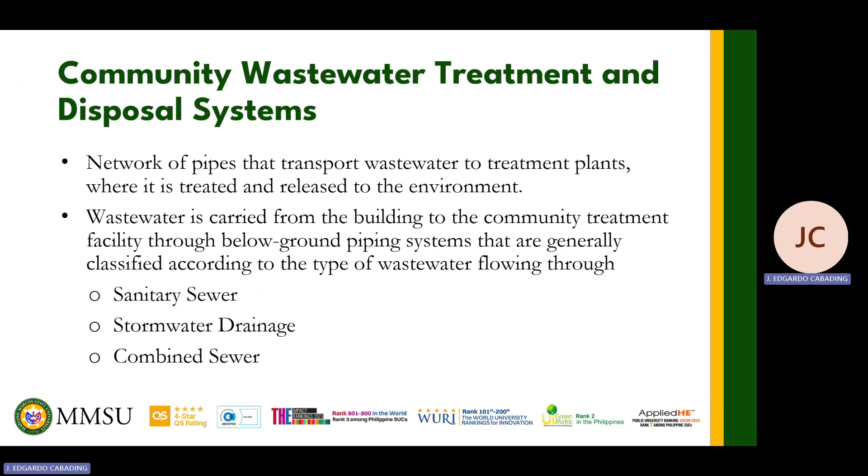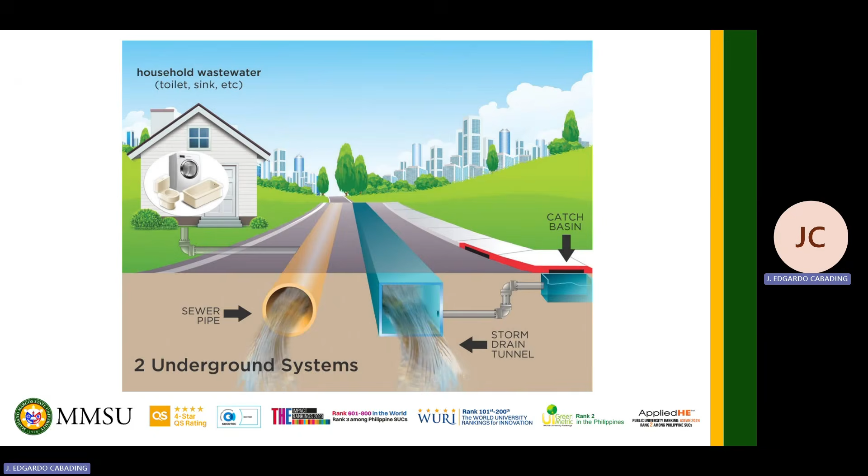If we do not have a public sewer, this is what we use: the on-site sewage treatment or alternative systems, also called septic or private sewage disposal systems. This is typically what we Filipinos use, because there is no developed public sewer in the country.

The building sewer is also included here. We discussed the building sewer in the previous chapter—that is the part of the DWV piping system that connects to the sewage disposal system.

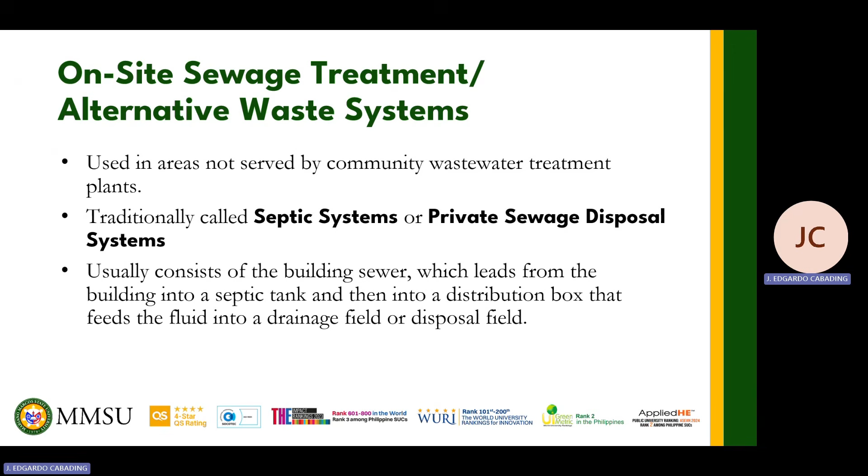These are the components of OSST. We have the primary treatment component, for example the septic tank. I say example because we also have other types of primary treatment components that work like septic tanks, but this is the most used because of its simplicity and practicality.

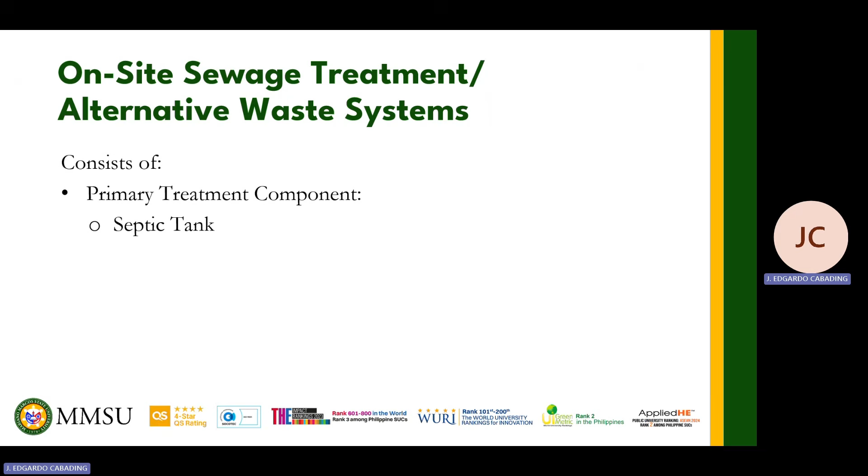The process is easy, the construction is easy, and it's cheap. Since this is what we've used in practice even before, we now have developed sets of codes that provide clear design guidelines for septic tanks, so it's regulated. Whereas for other examples of primary treatment components, we're not familiar with them, so for practicality we tend to shy away from using those other components.

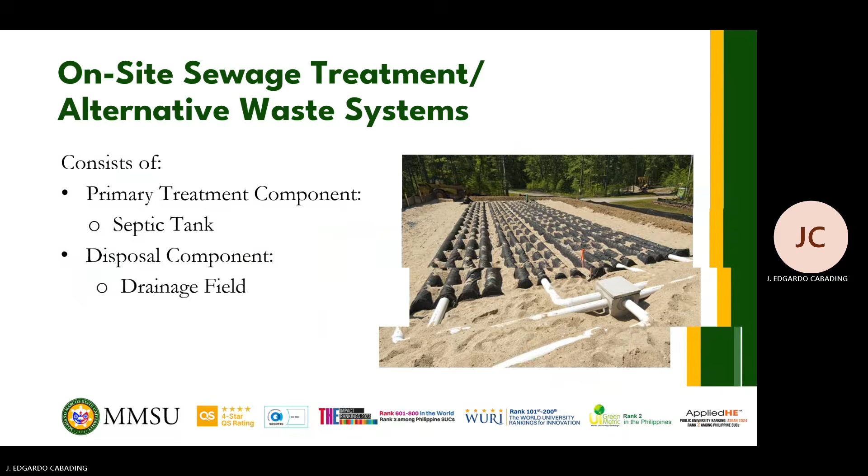Let me walk you through the process of an OSST, specifically the septic tank system that we use. Wastewater or sewage transported via the DWV system will end up in the septic tank, our primary treatment component. The wastewater then goes through several processes, including sedimentation, flotation, and anaerobic digestion.

In sedimentation, the solids will settle at the bottom of the septic tank and eventually become sludge. Then in flotation, the lighter liquids, such as grease and oil, will float to the surface and become scum.

In anaerobic digestion, the anaerobic bacteria consume the organic solids that settled at the bottom from sedimentation. These bacteria live in the septic tank in the absence of oxygen, since we seal it off so no air can get inside the septic tank.

So after some time, guys, these solids will become sludge. Like I said earlier, kapag sinilip niyo yung septic tank niyo, ito yung black na makikita niyo doon. And ang mapoproduce natin sa treatment natin is what we call the effluent - yung partially treated wastewater na slightly clear na from solids and scum na gusto nating ilabas out of the septic tank.

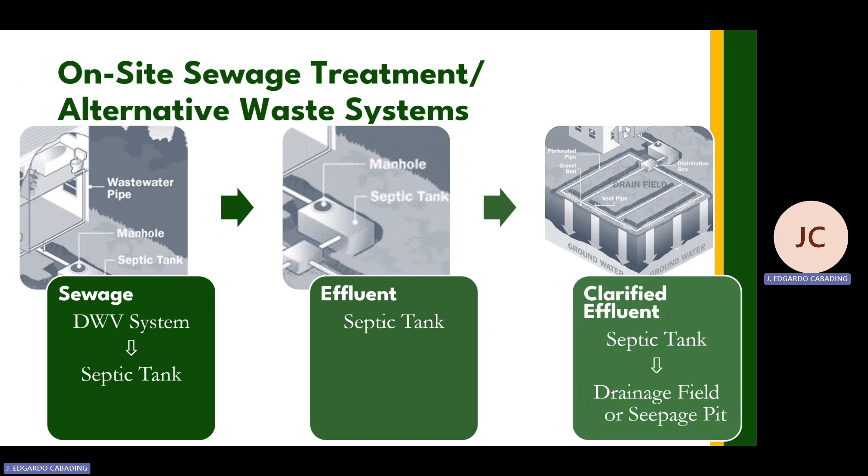After nating maipasa yung effluent papunta sa disposal component or the drain field, dito naman matitreat further yung effluent natin. Since dadaan sa effluent sa lupa, the soil will become a filter para malinisan ng maayos yung effluent na gusto nating i-drain into the ground. So nagiging clarified effluent na siya after this.

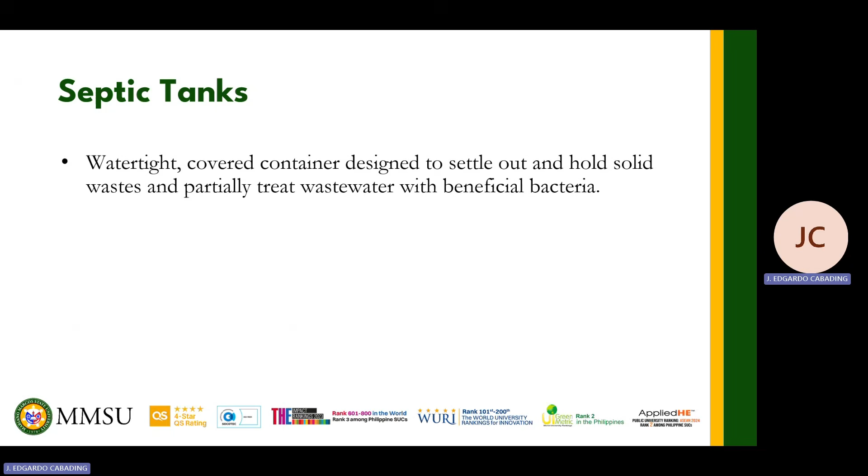Let us now discuss septic tanks further. So ito yung description niyan, basahin niyo na lang, na-discuss ko naman na to kanina - na nakulong, at since kulong, walang oxygen sa loob. Therefore, nagkakaroon tayo ng anaerobic bacteria na nangangain doon sa waste natin sa loob. So silipin natin yung loob ng isang septic tank.

So ito siya, parang similar sa isang interceptor. Pag pumasok yung sewage natin diyan sa may inlet, nasa-separate yung sludge tsaka yung scum sa taas tsaka dun sa baba. Yung nasa gitna, ayun yung effluent natin - yung tubig lang, at ayan yung gusto nating i-drain sa ground, yung gusto nating palabasin out of the septic tank through the outlet.

In here, guys, meron tayong mga baffles - ayun yung nagko-control sa direction ng flow ng sewage in and out or through compartments. Sa gitna, meron tayong wall separating the two compartments. So yung septic tank, guys, minimum of 2 compartments tayo, pwedeng mas madami yan. In the RNPCP, yung design for septic tanks is pang dalawa lang, so sa design procedure na i-discuss ko later on, dalawa lang yung compartments natin.

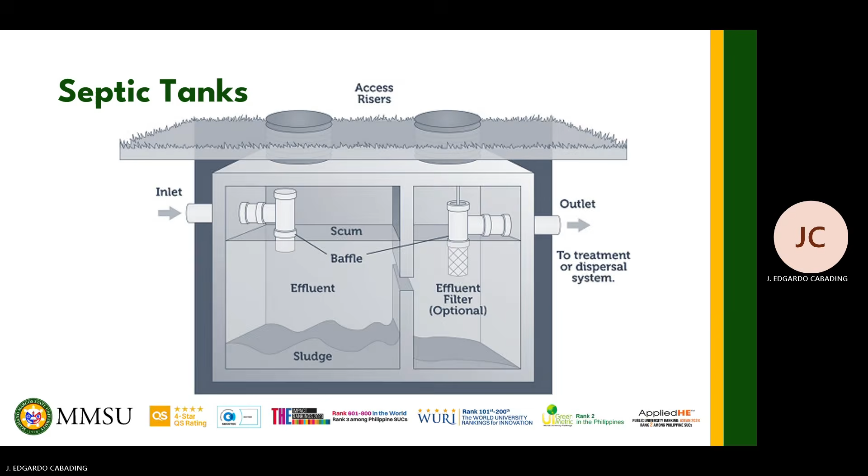Next, you have the code requirements for septic tanks. Ito, illustrated lang siya. Importante lahat ng to, guys, pero let me just elaborate on some of this. Hindi lahat, yung iba aralin nyo na lang. So pwede kayong tumingin sa code, tapos tingin kayo dito sa mga figures na pinoprovide natin.

First, we have the volume of the compartments natin. Sabi dito, guys, yung inlet compartment daw natin shall not be less than 2/3 of the total septic tank capacity, while yung secondary compartment naman natin shall not be greater than 1/3 of the total septic tank capacity. Yung 2/3 na to, minimum yan, tapos yung 1/3 of the total tank capacity naman na to, maximum yan.

Ayun lang yung sinasabi ng code. So meron din tayong minimum volume na kailangang sundin for the compartments. For the inlet, that should be 2 cubic meters, and for the secondary compartment, that should be 1 cubic meter. So hindi porket sinabi natin kanina na maximum yung 1/3 of the total tank capacity, pwede mo na siyang babaan ng babaan - you have to still make sure na fina-follow mo yung 1 cubic meter na minimum.

Para naman sa dimensions ng compartment natin, for the lengths, yung inlet compartment natin shall have a minimum length of 1.5 meters. For the outlet naman, nagkakaroon lang tayo ng minimum length dito if yung total tank capacity natin exceeds 6 cubic meters, and that will be 1.5 meters. As for the width naman of the septic tank, minimum daw shall be 0.9 meters.

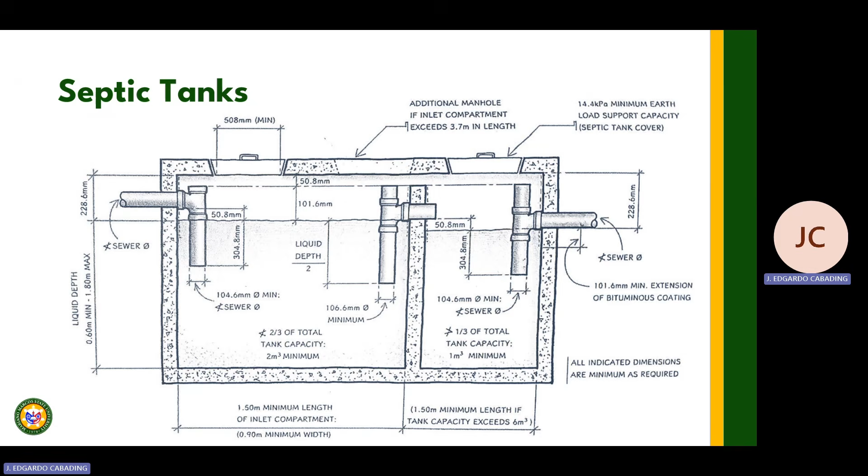So this is a different figure, but it shows the same thing, just more detailed. The section of the code is also noted there for your reference.

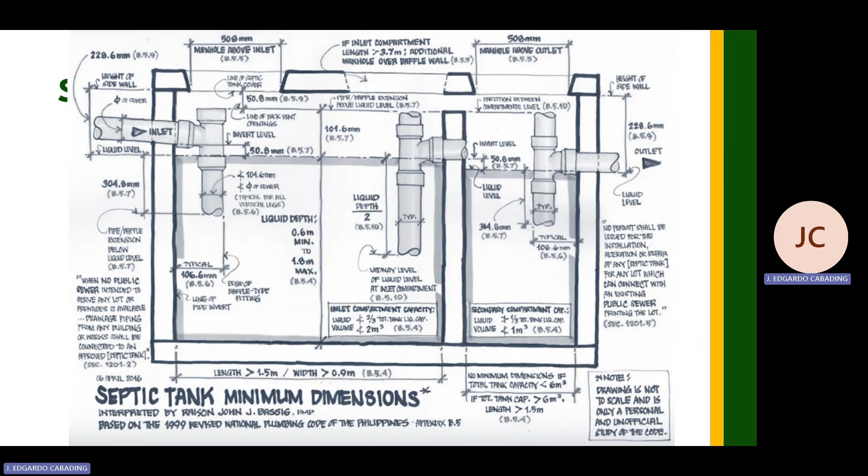Now let us proceed to septic tank sizing. This is based on Appendix B of the RNPCP. So again, this is procedural - we'll just follow the steps listed here.

First step, we are to determine the occupancy type of the building - whether it's residential or not, since that's our basis for which table to use. If residential, we use Table B-2; if other occupancy type, Table B-3. Then we'll compare later, referring to our DFU, and we'll also look at Table B2 for that.

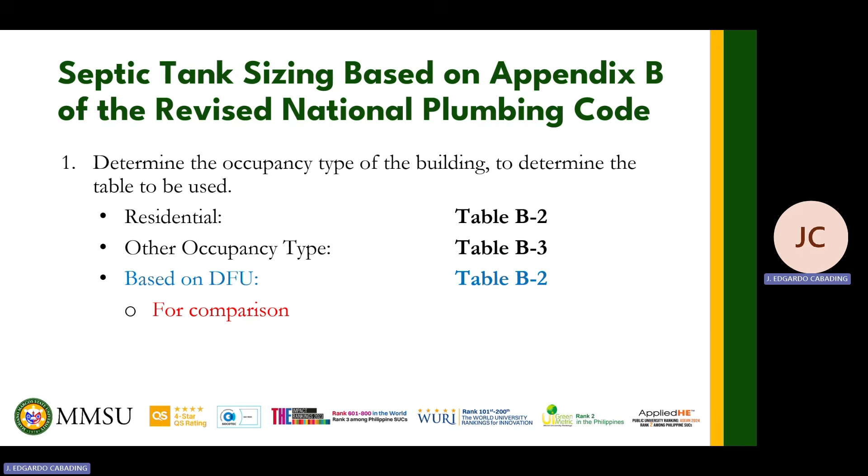So this is Table B2 for residential. We have a column here for the DFU value. For residential, we have two classifications: single family dwellings and multiple family dwellings. Single family dwellings are houses owned and occupied by one family. Multiple family dwellings are buildings with many units that can be occupied, like apartment units, condominium units, etc.

So this is the continuation of Table B-2. This is Table B-3, for other occupancy types. Here are listed the specific occupancy types of structures - that's what you check to know how to get the amount of sewage entering the septic tank, since that varies for different occupancy types, as you can see in the second column. The amount of sewage entering the septic tank that you get will then be used to size the septic tank.

Next, let's proceed to step 2. From the occupancy type of the building, we can determine which table to use. From these tables, we can now proceed to determining the tank capacity. So we'll be sizing based on the occupancy type, but we need to compare that with the size of septic tank we get if based on the DFU from Chapter 7 - that was our previous topic. Whichever gives a larger minimum septic tank capacity, that's what we consider for the design.

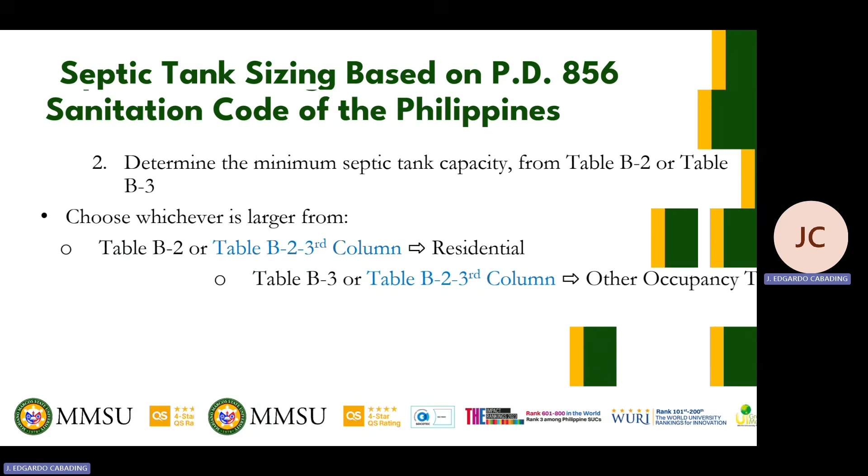Now let's elaborate on Table B-2, how to use it. This is the table you'll use for both residential occupancy and for sizing based on drainage fixture units. So the first thing you have to do, once you know the structure is residential, is determine whether it's a single family dwelling or multiple family dwelling units - is it a house, or an apartment, condo, and so on.

Let's say it's a single family dwelling. The next thing to do is determine how many bedrooms are in the house. After that, you can proceed to get the minimum septic tank capacity. So if the house has 1 or 2 bedrooms, you're here - you just follow this row until you reach the column for minimum septic tank capacity.

And since we use SI units in the Philippines, we look at liters. So for 1 or 2 bedrooms, our minimum capacity is 2,838 liters. For 3 bedrooms, 3,785. That's just how it works. For 4 bedrooms, 4,542, and so on.

From this table, it only goes up to 6 bedrooms. So what if it's a mansion with a lot of bedrooms? In cases like that, we look at the continuation of this table later, because it lists the capacity to add for each bedroom in excess of 6. That's it for single family dwellings or houses.

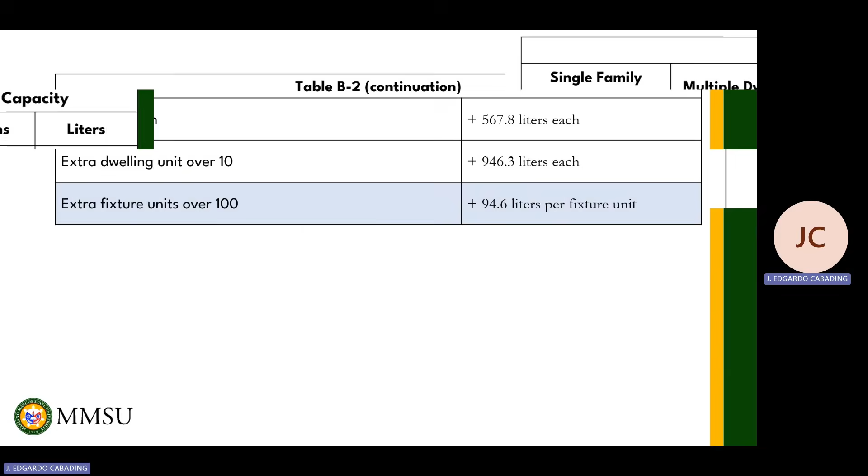Okay, so ito siya. For single family dwellings, pag more than 6 yung bedrooms, tingin tayo dito sa unang row. Say for example guys, if you have 7 bedrooms, you will be adding 567.8 liters dun sa 5,677.5 liters na capacity, kasi meron tayong isang extra bedroom. Pag 8 naman, magdadagdag ka ng dalawang 567.8 liters dun sa 5,677.5. So that is 2 times 567.8 plus 5,677.5.

Okay, bakit ito yung tinitignan natin? Syempre ayun yung capacity pagka 6 bedrooms. Kumbaga ayun na yung sinasagad ng table na to, and then pag extra bedroom, tingin na lang tayo sa table kung ano yung i-add natin dito.

So for multiple dwelling units naman, nag-a-apply pareho dito yung row 1 tsaka row 2. Unahin natin yung row 1, yung extra bedroom titignan natin yan. Sabi nga sa unang part ng table na to, each unit is considered to have only one bedroom each. Paano kung each unit has multiple bedrooms? So ganito.

Let's say for example we have an apartment na merong 6 units. Ngayon, tatlo sa units na yon, iisa lang yung bedroom. Dalawa sa units is dalawa yung bedroom, and then merong isang unit na tatlo yung bedroom. Sana na-gets ha. So paano natin i-determine yung minimum septic tank capacity that will serve the structure?

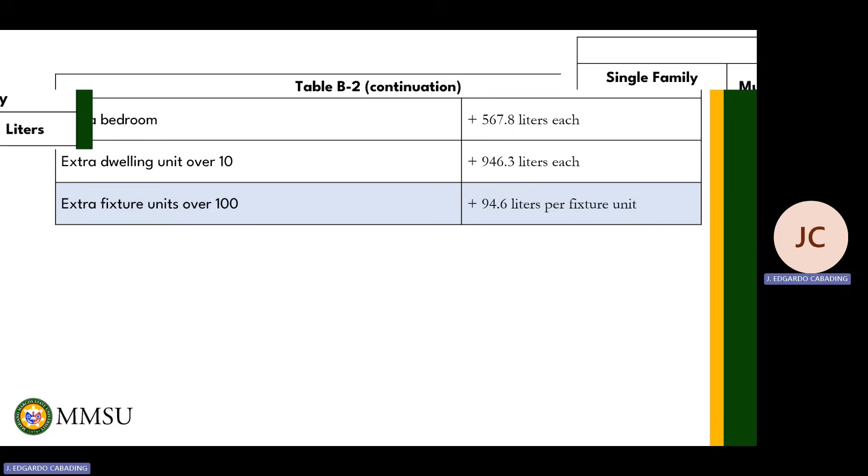Una, tingin muna tayo dito, sa 6. Therefore yung capacity natin, if we have 6 units tas iisa silang bedroom, is 9,462.5. Pero gaya ng sabi ko, hindi naman lahat ng units natin tig-isa yung bedroom. So for all units with more than one bedroom, yung ibang bedrooms nila will be considered extra bedroom from the continuation of the table. So in this case, ilan ba yung extra bedrooms natin?

So let's count. We have two units with two bedrooms each, so that is 2 extra bedrooms. And then we have one unit that has 3 bedrooms, so we have another 2 extra bedrooms. So all in all, guys, 4 is our total extra bedrooms.

So we will add 4 times 567.8 liters, that capacity given for 6 units with 1 bedroom each. So that is 4 times 567.8 liters, and then we add that to the 9,462.5 we got earlier.

So for more than 10 units, we only look at row 2. For example, if we have 11 units, then we will be adding 946.3 liters each to 1,000... that's what I meant, each 11 units. So if we have 11 units, we add 946.3 liters to 13,247.5.

So if 12 units, then two times 946.3 liters is what we add to 13,247.5. That is 2 times 946.3 liters plus 13,247.5. And lastly, for the DFU, we look at the third row.

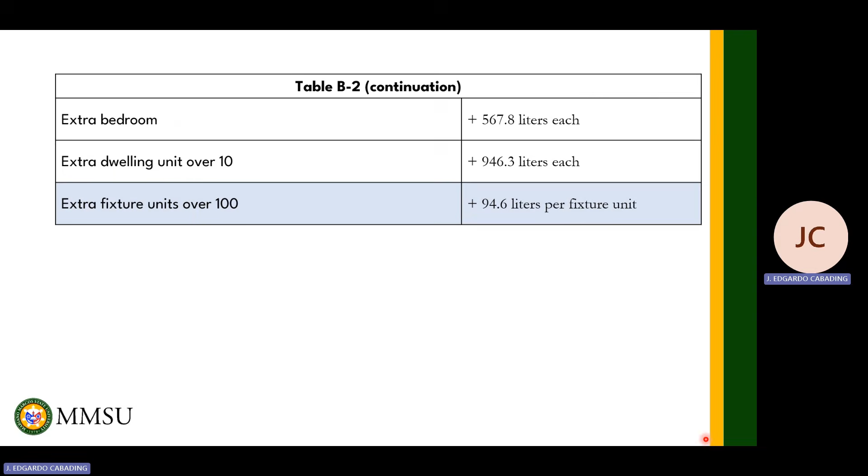So for example, if we have 10 DFU in excess of 100, that is 110 DFU, we will add 10 times 94.6 liters to 13,247.5. I hope you understand now.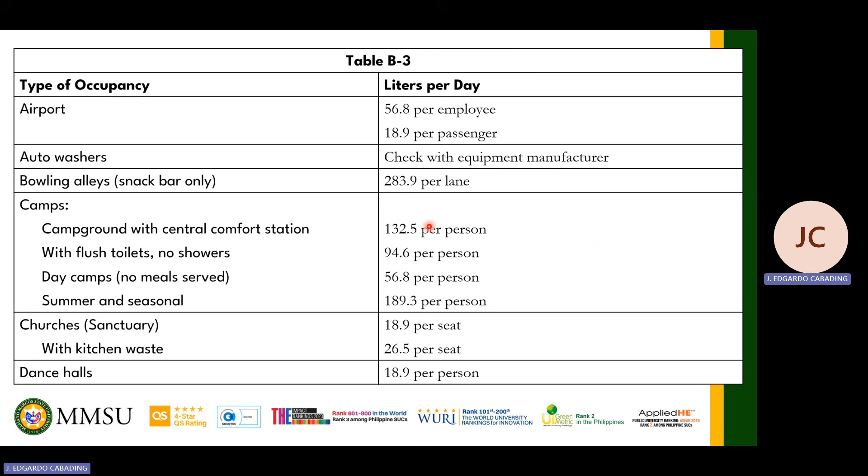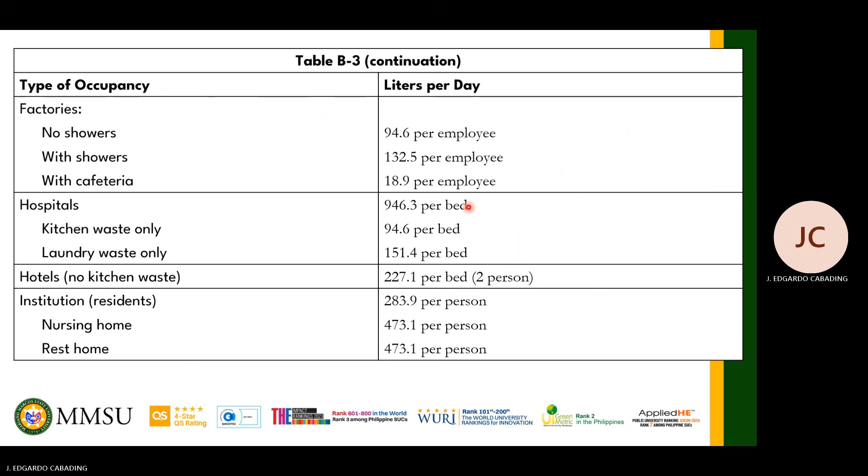That's how it is. So to get the liters per day, we just need to know these quantities, and that's what we'll use to solve for the flow rate. Once we get the flow rate of sewage in liters per day, we can now determine the minimum septic tank capacity.

We're still talking about Table B3. So if the flow rate is less than or equal to 5,677.5 liters per day, our capacity is just equal to the flow multiplied by 1.5. If it's greater than 5,677.5, our capacity is the flow multiplied by 0.75 plus 1125.

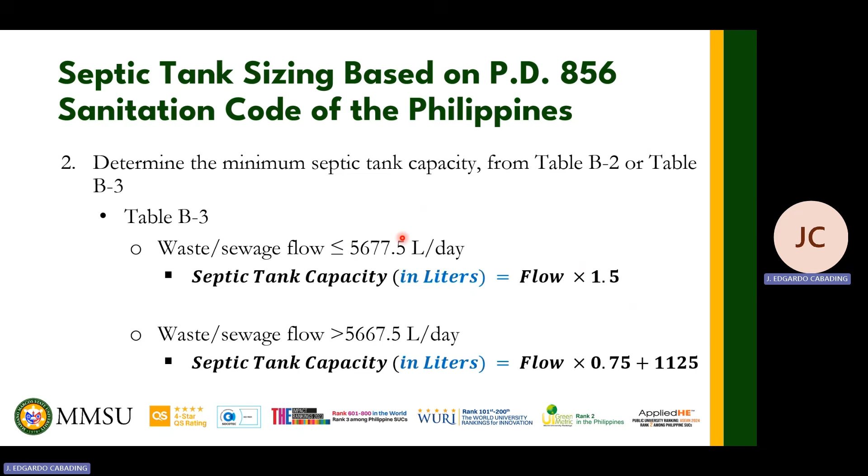Once we get the minimum septic tank capacity, we can then determine the volume of each compartment. Note, guys, as I said earlier, we will only be designing 2-compartment septic tanks here. So we have the inlet and outlet or secondary compartments. To determine the capacity of our compartments, for the inlet, we just have to multiply the total capacity by 2/3.

Note, guys, that this is the minimum volume of our compartment, so it can be higher than what we get here. But another thing to note, we shouldn't go below 2 cubic meters. For the outlet compartment or the secondary compartment, we just have to multiply the total capacity by 1/3. Here, note again that this is the minimum volume of the compartment, so it can be higher than this, but we shouldn't go below 1 cubic meter. Okay, we discussed that earlier in the code requirements.

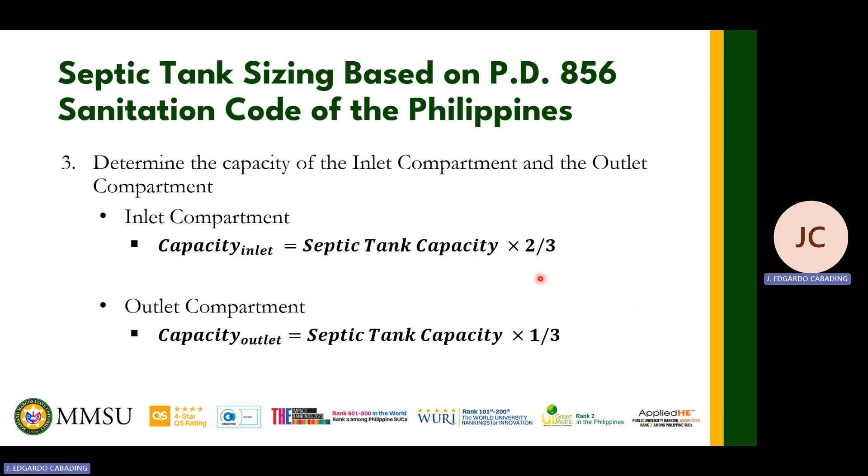Once we know what the volume will be for each compartment, we will be designing the width and height of the compartments. And of course we should base that on planning restrictions such as the allotted space for the septic tank and soil limitations. In addition to the minimum widths and lengths of the septic tank, we should know the clearances for the septic tank. But this is our minimum width and minimum length.

So for the outlet compartment, guys, we have a minimum length when the tank capacity is greater than 6 cubic meters, okay?

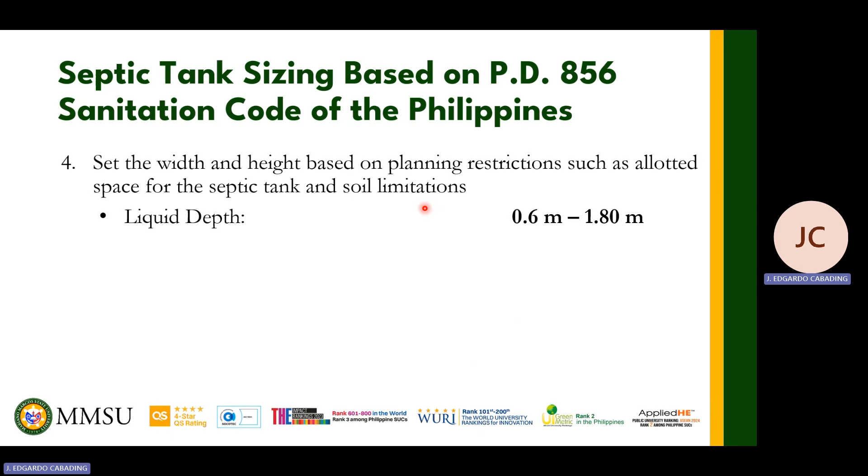So when we design, we need to consider the height of the sidewall above the liquid depth. That's the part of the septic tank that isn't reached by the sewage, so that's the allowance. We'll just add that later to the height we're considering here. For now, when we're referring to our capacities, we'll just look at the liquid depth. So for now, our height here is the liquid depth, and our range is 0.6 to 1.8 meters.

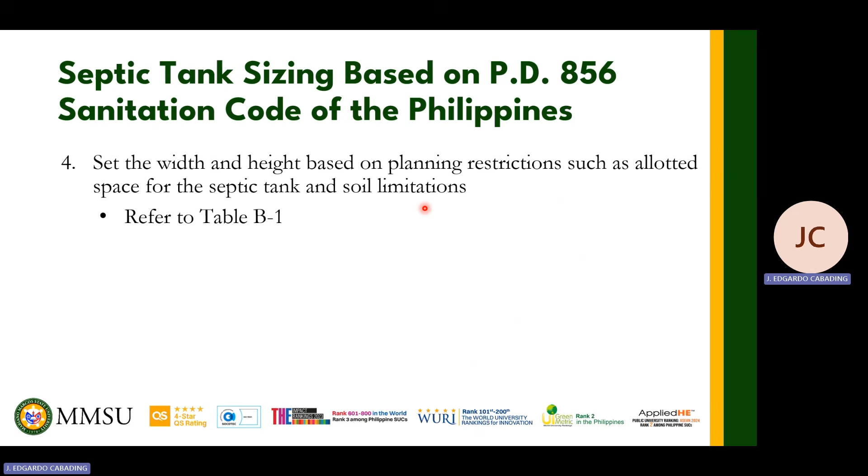And then, as I said earlier, we also have to look at the clearances required by the code so we can design based on planning restrictions. So we'll just look at table B-1, and here it is, okay? We just have to look at the column for the septic tanks. So the distance of the septic tank from the building or structure should be 1.5 meters, okay?

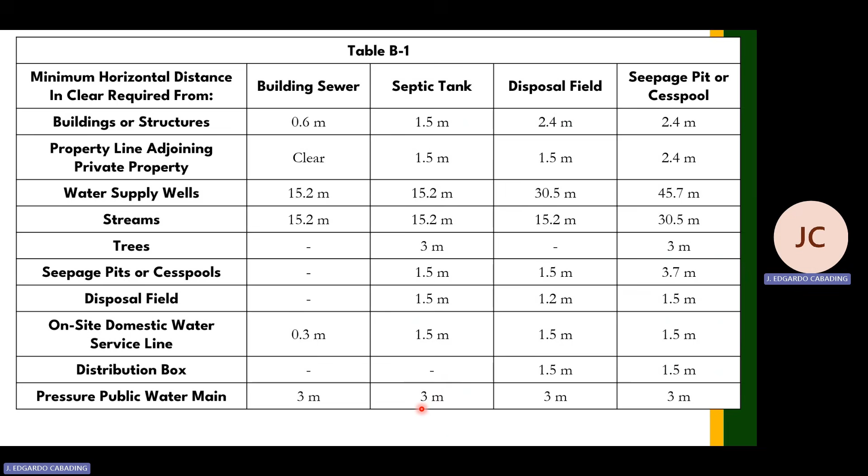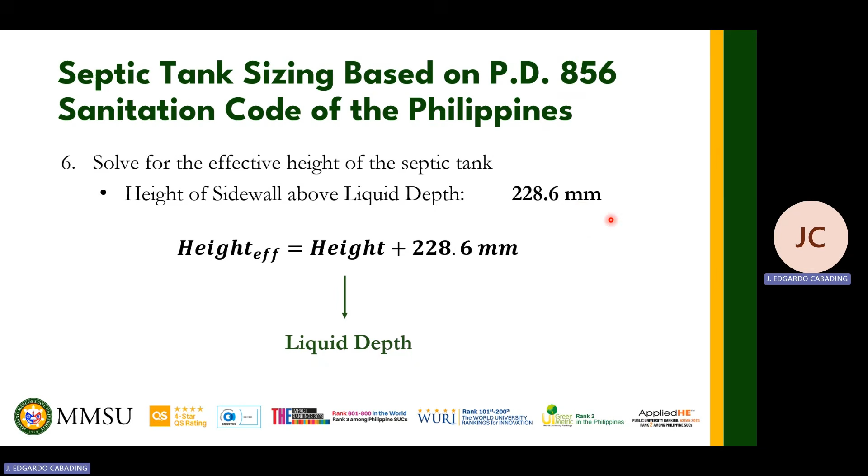Then next, we'll get the actual height of our septic tank, this time considering the allowance or the part of the septic tank not reached by the sewage. So we just have to add 228.6 millimeters to our height or the liquid depth. And in practice, guys, usually just make that 0.3 meters, for practicality, so it's easier for them to measure when they construct it. So you know, you give that kind of measurement to your workers.

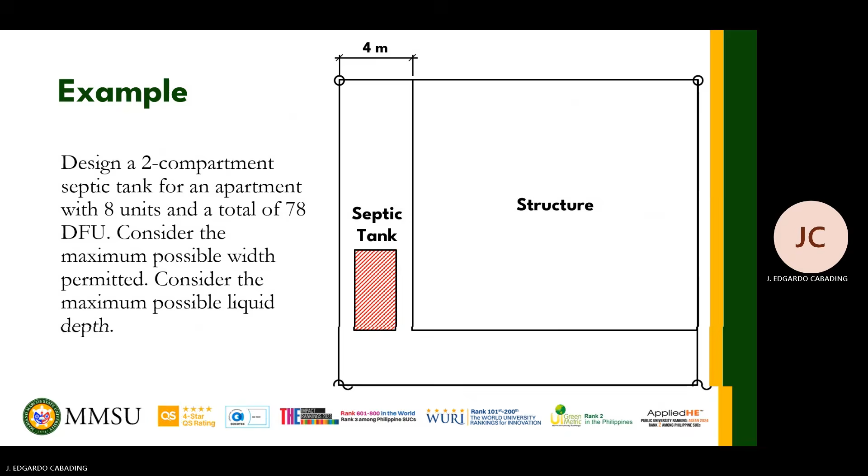To help us understand better, let's solve a problem. Design a 2-compartment septic tank for an apartment with 8 units and a total of 78 DFU. Consider the maximum possible width permitted as well as the maximum possible liquid depth. So we're maximizing here, guys, the width and liquid depth, so we can minimize the length of the septic tank. Okay, step 1, determine the occupancy type. So as said earlier, it's an apartment, that is residential, specifically multiple family dwelling.

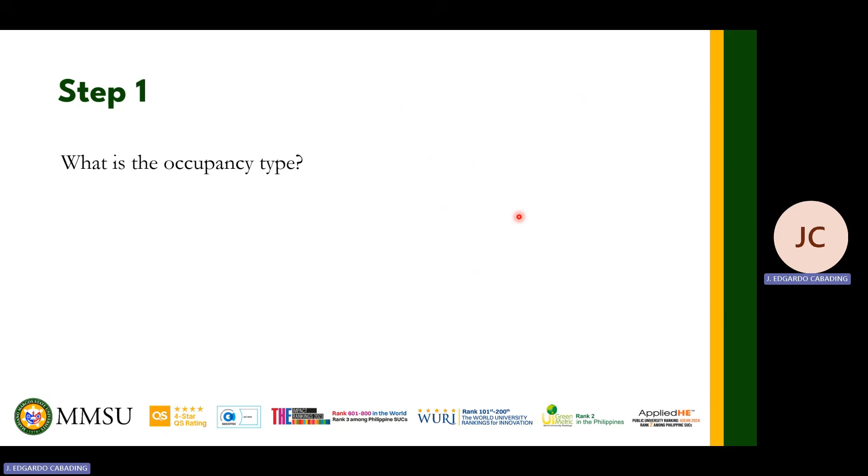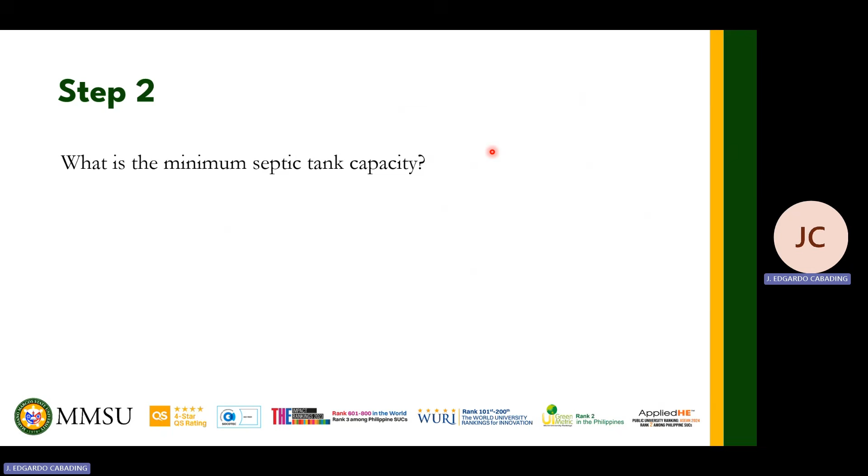Multiple dwelling units, so we can use table B-2. Step 2, what is our minimum capacity? We have to consider that this is an apartment with 8 units and also that we have 78 drainage fixture units. So let's look at table B-2 for our apartment with 8 units and 78 DFU.

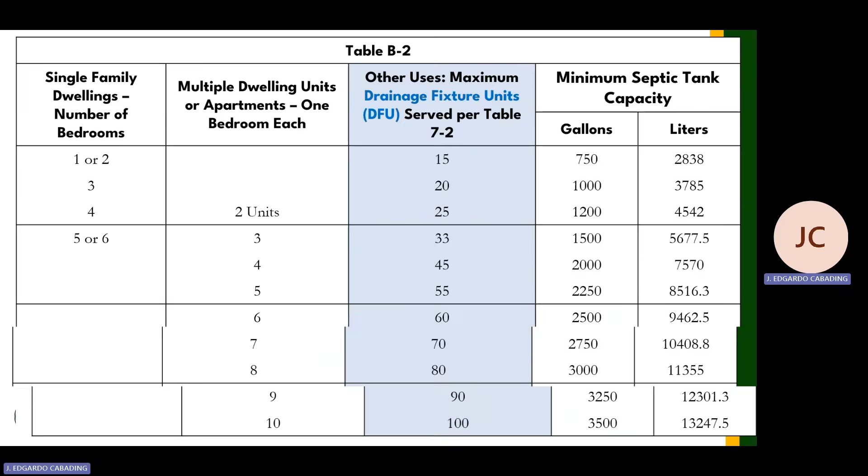Liters. But of course, let's also compare that to the capacity we'd get if we base it on DFU. According to the problem, the DFU is 78. Therefore, we look at the fixture unit value in the table that is equal to or greater than 78, and that is 80 DFU, so we use this row. Therefore, our capacity is also 11,355, the same value, so 11,355 is the capacity we will use for the design.

Next step, let's solve the capacity of each compartment. For the inlet, we simply multiply our capacity by 2/3. So that is 11,355 times 2/3. Therefore, the capacity of our inlet is...

7,570 liters. Then let's convert that into cubic meters, since we design in meters for our dimensions, and we round to 1 decimal place for practical reasons. We'll do the same for the outlet or secondary compartment, this time multiplying by 1/3. That is 11,355 times 1/3, which is 3,785 liters. Let's also convert that into cubic meters, again to 1 decimal place.

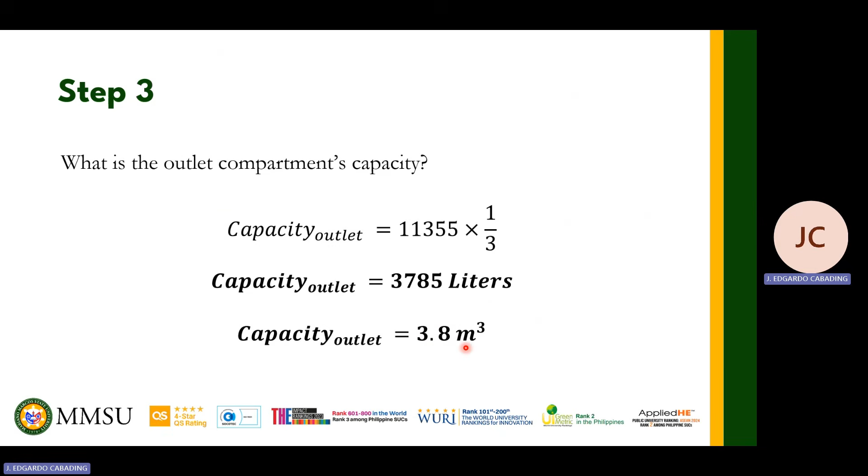Next step, we solve for the width considering planning restrictions. Looking at this, the septic tank is positioned in this part of the lot, and the distance between the property line and the structure is 4 meters, from here to here.

Now going back to the clearances set by the code: the clear distance between the property line and the septic tank is 1.5 meters, as shown earlier in table B-1. And between the septic tank and the structure, that is also 1.5 meters. From that, we can get the width we can maximize considering these restrictions. So our width is equal to 4 minus 1.5 minus 1.5, which is 1 meter.

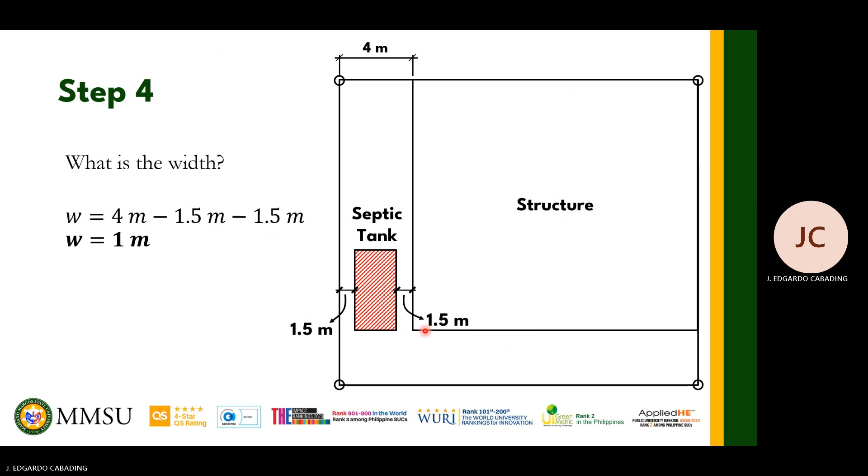So that's the width. Next, let's determine the height or liquid depth. The problem says maximum, so we maximize it. From the range of liquid depth, which is 0.6 to 1.8 meters allowable per code, we will set our liquid depth to be 1.8 meters.

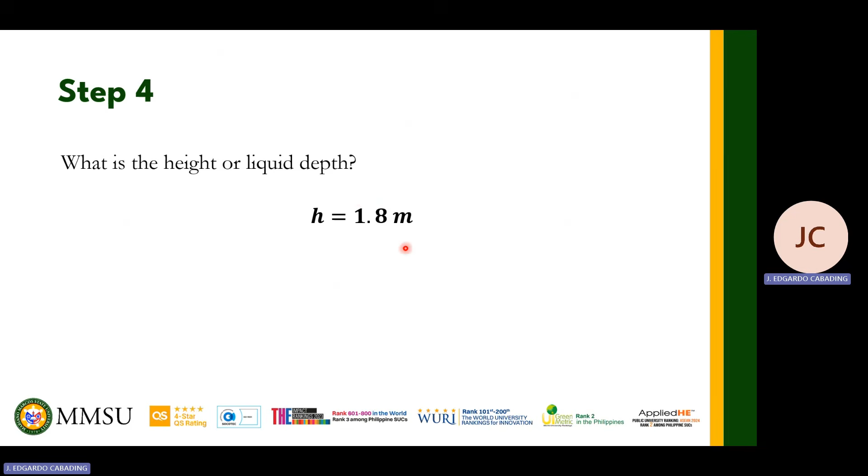After that, we can now solve for the lengths of the compartments. First, the inlet: we have the capacity of the inlet, 7.6, divided by the width of 1, times the height of 1.8 meters. So for our design, we will be considering an inlet compartment length of 4.3 meters, rounded to 1 decimal place.

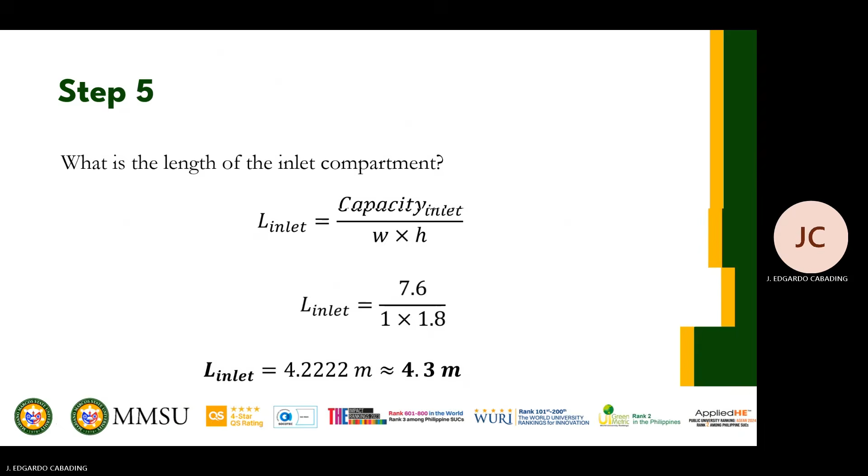Same for our outlet. So for our design, we will be considering an outlet compartment length of 2.2 meters.

And lastly, our effective height, which is the total height of our septic tank including the allowance. Here we just add the liquid depth and the height of the side wall above the liquid depth, which is needed according to code. The code requires a minimum of 228.6 millimeters for the height of the side wall above the liquid depth. In our case, I'll consider 0.3 meters for 1 decimal place. Therefore, our effective height is 2.1 meters.

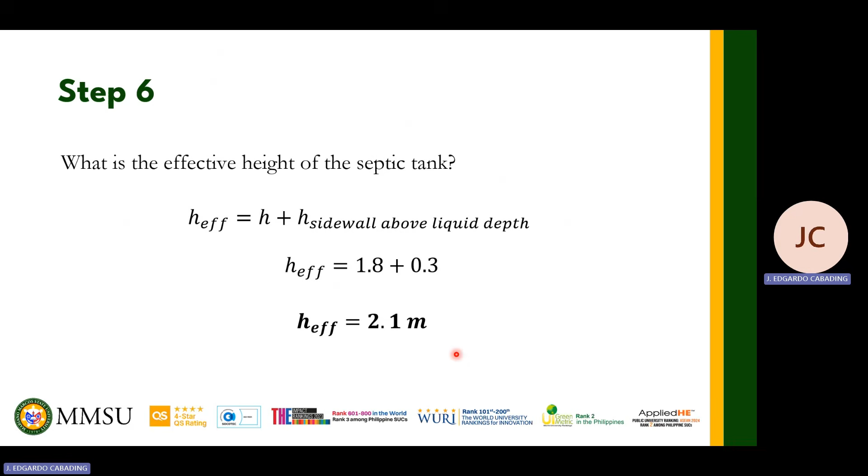Verify for yourselves whether what we've done is correct. Cross-check with the code to see if we've missed anything or not. So that is how you design your septic tank according to the code.